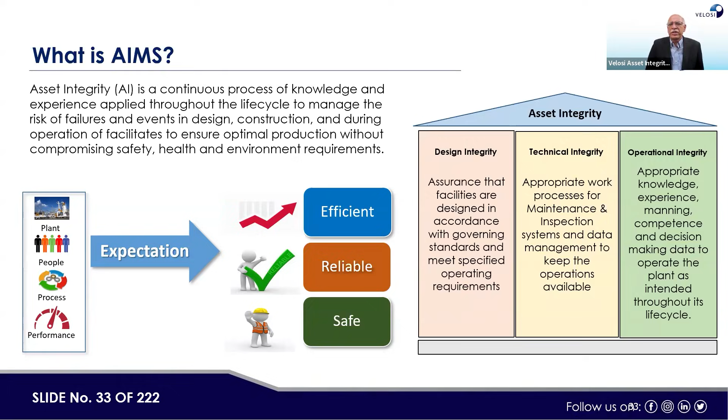Then in between there's technical integrity, which generally covers inspection activities, preventive maintenance, condition monitoring, predictive maintenance, and how you manage the facilities or the modification processes. So in general, to have more efficient, more reliable, and more safe operations, all three aspects are important and relevant. Now, what is HSEMS?

HSE - H means health, S means safety, E means environment. MS means management system. If we are having any running facility or operating plant, there could be some side effects or some operational threats of those operations which are being run.

For example, if we are producing fertilizer, if we are producing glass, if we are producing oil and diesel fuel and gasoline fuel out of crude oil, or if we are producing crude oil or gas from the wells, from the underground wells. So all these aspects may have certain HSE related threats, and we need to manage them.

Because if a toxic gas releases out of any process, that can kill people. So we need to make sure the toxic gas does not come out of the boundary of the equipment, does not leak. If it leaks, it could be predicted, it could be detected, and then the operators or the surrounding of the facility should be able to take proper protective actions.

Similarly, any flammable fluid can create fire, so prevention of fire is another area. Similarly, if operators are working on any particular plant, there could be a health impact on the operators due to the release of any vapor or chemicals being processed by the facility, so those should also be managed. Similarly, work permit systems, work processing, like hot work permit, cold work permit,

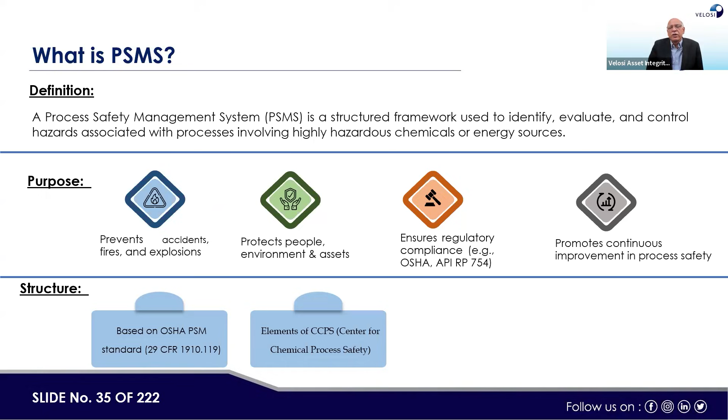If we try to make a comparison, all these elements are basically correlated, and we can make their comparison. Similarly, there are API standards like API 750, API 14J, API 754, and other API standards are also there, like API 584 and so on. NFPA 30 is also another area which gives good advice regarding process safety related issues.

Now if we see what the purpose of all three is, like AIMS, HSEMS, and PSM. We are not saying so far AIPS, which is asset integrity and process safety. The focus of AIMS clearly is asset integrity management related objective, HSE mainly managing the safety, and process safety by name covers practically both, because process safety cannot be achieved if we will not have a better AIMS system.

Because if a proper inspection and maintenance program is not being developed by the operating company, there could be an incident. So the combination of HSE related controls like PPE control, work permit system control, and other risk identification and risk management related controls, along with asset integrity management controls, are taken care by PSM. There is a commonality between AIMS, HSEMS, and PSM, which is basically the safety, health, and environment related aspect. So indirectly or directly there is a commonality in all three concepts.

So scope-wise, AIMS mainly focuses on assets, equipments, inspection, maintenance, lifecycle management, and its integrity. Similarly, HSEMS is more towards workers, environmental and safety aspects, health aspects, or environmental aspects. Then PSM, in my view, is a combination of both AIMS and HSEMS.

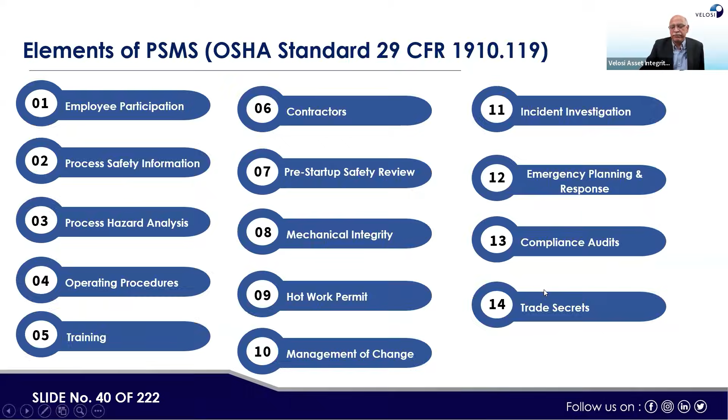These are the 14 elements for OSHA. The standards we are referring to are ISO 55001, OSHA 1910-119, and HSEMS, which is HSG65. If we try to find the equivalent standard in ADNOC, ADNOC also has an asset integrity management standard, or control procedure. They also have HSEMS, and they have also developed the AIPS standard as well.

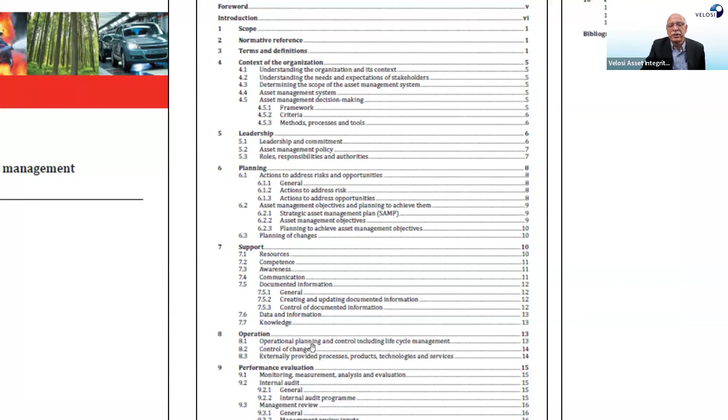This is the front page of ISO 55001, year 2024, asset management system requirements, and these are the elements - 7 elements, starting with context of the organization, leadership, planning, support, operation, performance, evaluation. Similarly, this is the outline I have taken from OSHA 1910-119 from their web page.

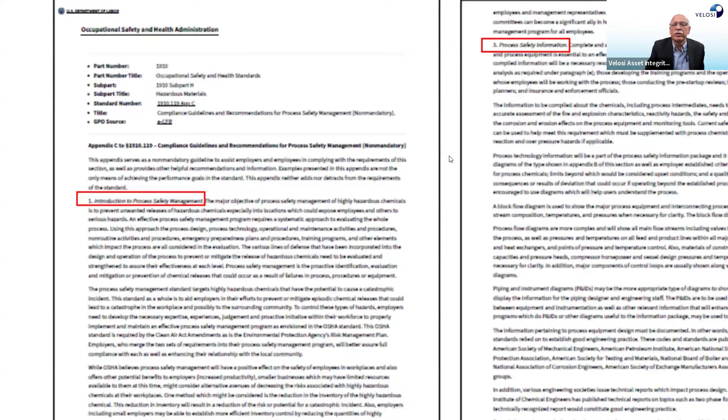So these are 14 elements. A lot of text is there, explaining each element. But if you wish to see them, this is a safety management system, or process safety information - process safety information is here. So similarly, these are the 14 elements. I'm not going through them, just showing you. Their details are available in this document which is attached, and this document can be downloaded. Both OSHA as well as HSEMS can be downloaded from their web pages free of cost.

So these are the standards. Now if we try to compare them, mostly things are matching - let's say risk profiling, or the aspects of, for example, planning, or support, or operations. So we try to bring in the elements that are superseding, or some alignment is there either in the main element or in the sub element.

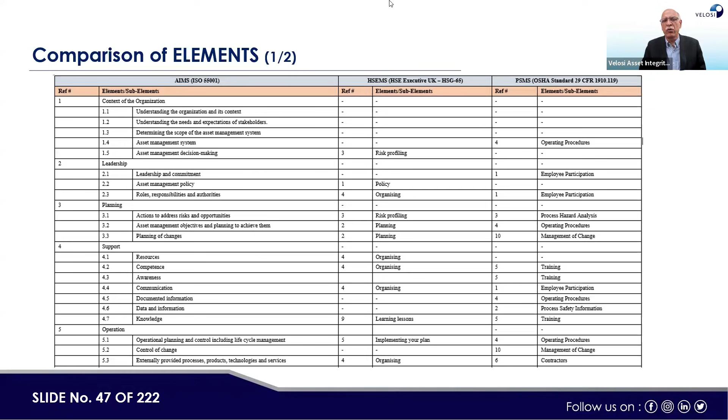This is the purpose. Now, what is AIPS? Basically, AIPS is AIMS plus PSM, asset integrity and process safety. When we say process safety, HSEMS is also direct or indirect part of process safety, but it's more towards people, whereas process safety is more towards the process. So by combining AIMS and PSM together, we may cover both HSE as well as asset integrity management through one umbrella.

Even though, like in ADNOC, still they are having 2 VPs in the organization. One VP is for HSEMS, another VP is for AIMS. Or there are also some scenarios where we have AIMS, and also one VP or manager for the PSM. So can we have one manager for both? That is the target. If we combine AIMS and PSM together and make AIPS, then organization structure wise, there could be one organization rather than two, as we are having nowadays with AIMS and HSEMS or AIMS and PSM. So that is the consideration, or soul searching, ongoing in various organizations.

And ADNOC has come forward to make AIPS, and this standard has been issued, I think, 2-3 years ago, and now it's under the implementation phase. So now, one thing to understand, there are certain risks which are coming from AIPS, asset integrity process safety - asset integrity and process safety, not artificial intelligence and process safety.

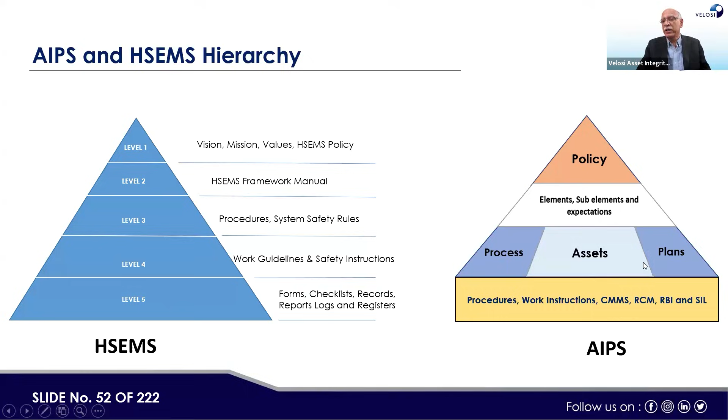But from an aspect point of view, here we have work process management system in HSEMS - hazard analysis, work permit system, cold work permit system, hot work permit system, PPEs and so on coming there, checklists and forms, work at height, safety of lifting equipment, electrical safety, LOTO system - those come under HSEMS. Whereas the management of the complete asset system, like operating manual, DCS, ESD system, fire and gas management system, CMMS system, IMS system, all the plant related operations come under this side of AIPS.

Now, to check whether the message is being received by the audience, the first question is: AIPS is a combination of what? Please type in your answer in the chat window. We'll see the responses.

AIPS is the combination of AIMS plus PSM, or AIMS plus HSEMS, or HSEMS and IMS, or AIMS and AIRMS. Mostly the answer given is true, and the correct answer is A: AIMS and PSM's combination is called AIPS. Again, AI here is Asset Integrity Management, not artificial intelligence. Nowadays there's a lot of focus on artificial intelligence, so I don't want that to cause confusion.

Now one more question, just to check our memory. How many elements are there for PSM, OSHA standard 29 CFR 1910-119? Options are A) 07, B) 08, C) 14, D) 20. The answer is mostly being given correctly by participants: 14.

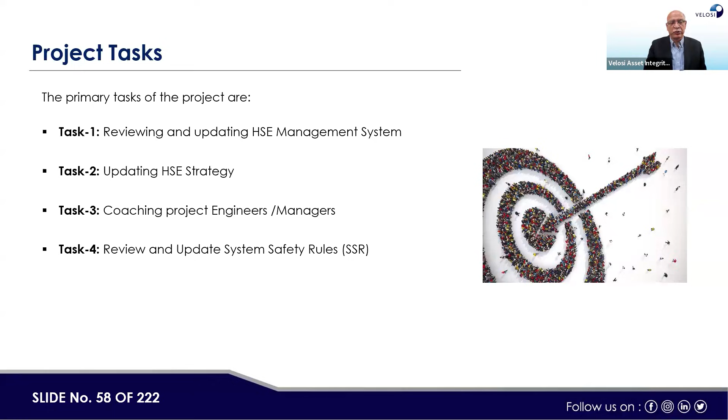The scope included reviewing and updating the HSEMS management system, updating HSE strategy, coaching project engineers and managers, and reviewing and updating system safety rules. This scope was compliant with ISO 9001, 14001, 45001, 50001, HSE Executive UK, OSHA USA, HS(G) 65, also OSHAD, TAQA, Department of Energy in UAE, and procedures and legal requirements were also taken from the operating company.

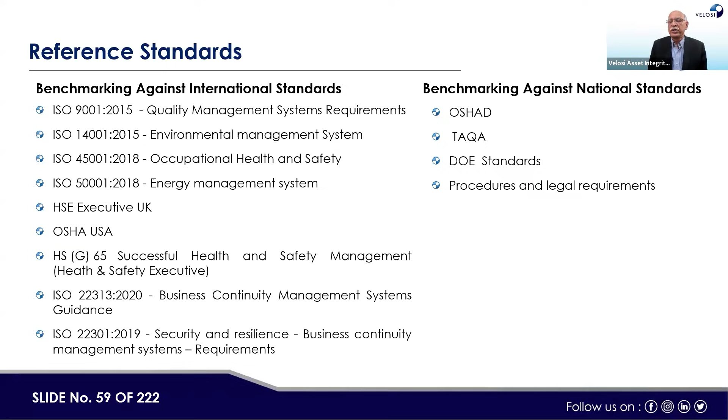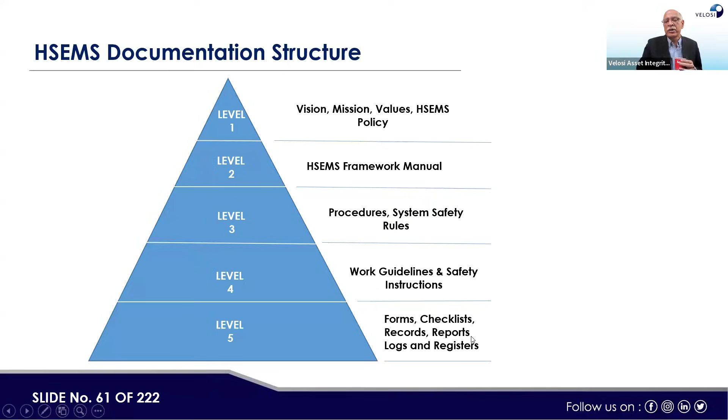Level-wise, the same 5-level documents were prepared: vision, mission, values and HSEMS policy; HSEMS framework manual; procedures, system, safety rules; work guidelines and safety instructions; and forms, checklists, records, reports, logs and registers were also developed.

Here, same plan, do, check, act structure. Under plan comes element: leadership, commitment and accountability; then element 2, regulatory compliance and industry standards; then element 5, hazards identification, risk assessment and management.

Similarly under do, we have resources, competency training, communication awareness, documentation and information accessibility, engineering controls, safe operations, crisis and emergency management, integrity maintenance and reliability, management of change, and management of third parties.

Then when we go to the elements, if we have to see more details for each element, for example under leadership, commitment, and accountability, I will not go through all details, otherwise this will take more time. I have to cover almost 150 more slides, so there would be certain rush, since we need to close the presentation by 4 o'clock, Abu Dhabi time.

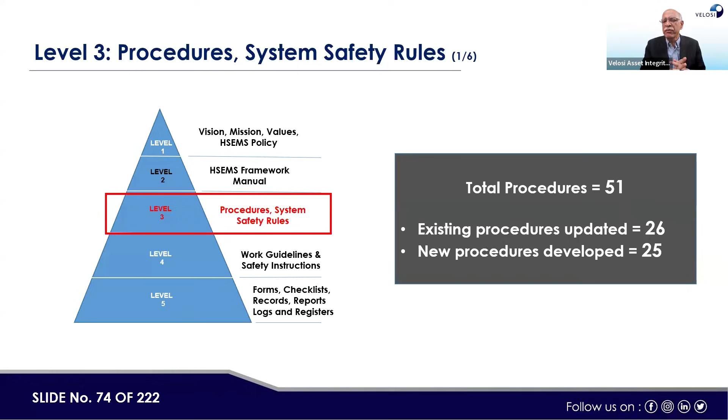So since we are just giving you an idea to have an HSEMS system, first is vision, mission, policy, and the HSE policy document is there. Then the framework is there, which I showed you. Now I have procedures. Total procedures 51, 26 existing, 25 new.

So what are those names? For example, procedure for control of documents and records. I'm not reading all, I'm saying one by one, but I will say a few. For example, procedure for HSEMS training and competency, procedure for HSEMS legal and other requirements, procedure for HSEMS monitoring and reporting.

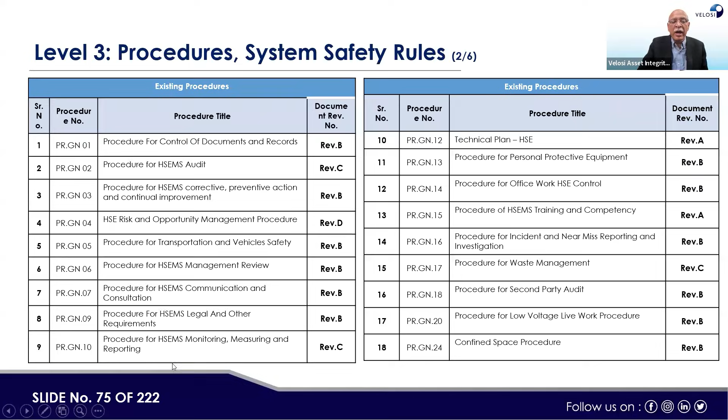Here, if I go to the last slide on the same series, procedure for safety signage and signals, portable power tools procedure, procedure for hazardous material. Similarly, system safety rules, client system safety rules, also prepared.

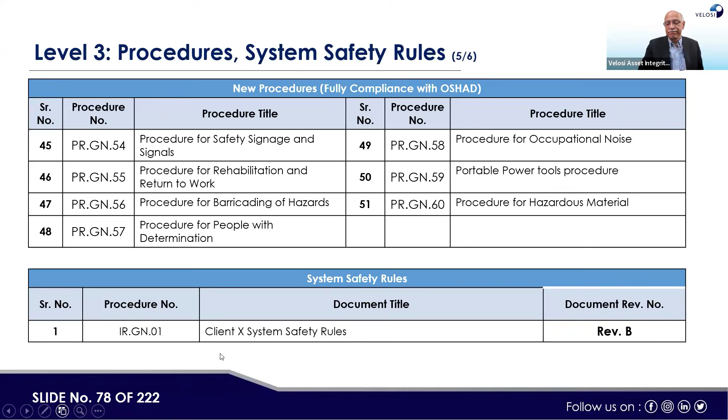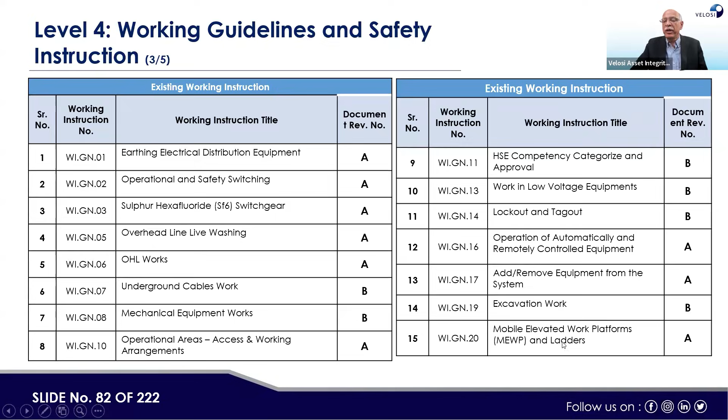And then these are the 15 guidelines and safety instructions. I will not read all, earthing electrical distribution equipment, for example, lockout and tagout guidelines, then excavation work procedure, mobile elevated work platforms, MEWP and ladders. So these are all guidelines and safety instructions issued and prepared.

So health surveillance plan, for example, this is one of the guideline procedures. You will see the content. So this is better, you can see here responsibility definitions, scope, purpose, introduction, then responsibilities, health and safety, health and surveillance program requirements, then implementation and so on. So these are the content of that particular procedure.

This is another HSE guideline for working in the vicinity of the asset. These are the emergency contacts and appendices for that, which would be used by the technicians, operators, and managers of that particular work center.

Now, last but not least, there are forms. 69 forms and checklists were prepared. For example, high voltage isolation of the switchgear checklist, HVLB cable maintenance, general confined space management, HSEMS induction checklist, life cycle of HSE risk assessment. There are various topics covered in these forms: environmental objective form, hazardous waste transfer form, qualification questionnaire for the contractors, HSE technical bid evaluation sheet.

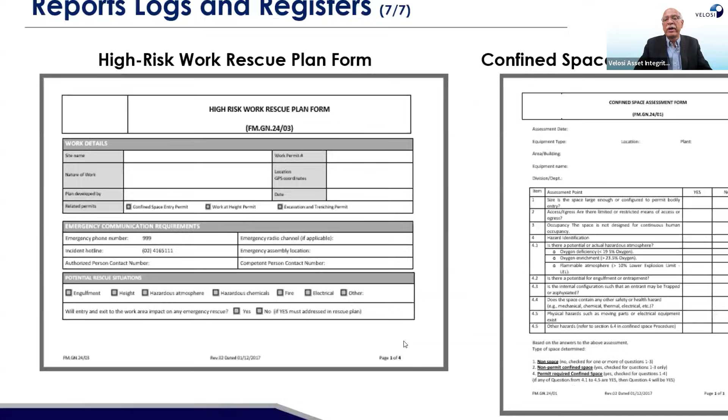The high risk work rescue plan form. The work details and requirements are filled and those are followed by the working team. Similarly, another confined space assessment form - a checklist which is required to be filled by the relevant job officer and the technicians.

So here's a question to make you people involved. How many levels are there in the HSEMS documentation structure? This question is to keep you awake, otherwise it's a very boring presentation. So the answer - one was wrong, I saw D was given, but mostly the answer is right, and that is B, 5. There are 5 levels in the document hierarchy for the HSEMS system.

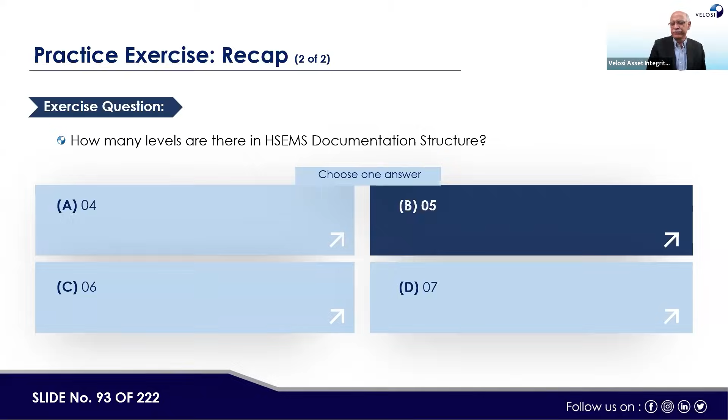It can also apply to AIPS as well. I will go through a sample dashboard of HSEMS, then we will have a question answer session at that stage. What is the purpose of an HSEMS dashboard? Real-time visibility of HSE performance, number one. We can also see what kind of incidents or incidental trends are there, then what kind of corrective action we need to take based on those trends. What are the audit recommendations? How many risk level aspects are there? What are the compliance tracking aspects? There could also be environmental monitoring, incident monitoring, safety related incidents, or even process safety related incidents which could be reported as well.

If you see here, for example, a normal dashboard - we were conducting one audit a month back. The company was using some HSEMS system, like HIRA, where they were reporting all the HSE related information in a common dashboard. It was quite effective. Similarly, Velosi's AIPS software has a similar reporting feature, which could be reported from each site, and then all company sites can be seen at head office through one dashboard. So here, total number of man hours, number of days without LTI (lost time incident), incident records, preliminary investigations, final investigations - all these counts can be shown through the dashboard.

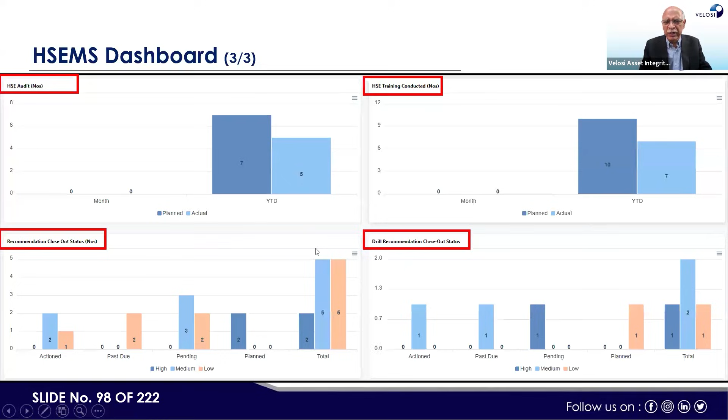That's the message. There could also be work permit related issues, environmental related performance, and health related performance as well. Here, audit plan - whatever the audit-wise pending audits or executed audits. Similarly, internal audit schedule, when it is required to be done, whether it is being complied with or not. Then here, a question: which of the following is not a KPI of HSEMS?

There is one negative question. Options are: lost time incident, near misses, fatality, and production. Which one is not an HSEMS KPI? Try to fill it in. Yes, mostly the answer is right.

It is production. When we talk about HSE, production is not a KPI for HSE in general. Somebody may also add this as a KPI, it's not hard and fast, but in general practice, this is the message. Some people may also add production, saying without production there's no safety, so production is also an HSE KPI. That could also be the case, but we can compromise on production, we will generally not compromise on safety.

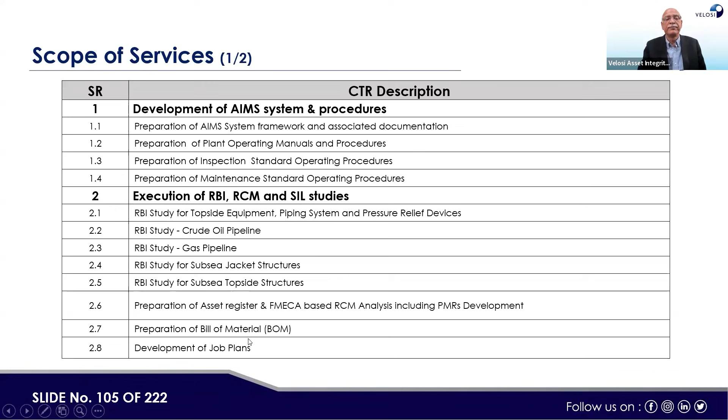Then preparation of the asset register, FMECA, RCM analysis, including PMRs and job plan development. Then preparation of the bill of material for various equipment, development of job plans or task lists or MWIs. Then identification of dead legs, small bore identification, injection points, corrosion monitoring and support locations, and preparation of their register. Preparation of inspection drawings for topside structures, for subsea jacket, for topside piping and equipment, and for pipeline and riser, seal review and assessment, spare part optimization except pipeline, then spare part optimization for the pipeline.

Then implementation of SCs identification and management system, and implementation of HSEMS and CMMS system as part of the overall project. So basically, if you see, all these processes we implemented - it was done at the project's initial stage when the project was being built. So all these studies were being done in parallel.

So when we go to the AIMS system, it was comprising of 17 documented systems. We have design and project management, PIMS (pipeline integrity management system), SC management system, pressurized equipment management system, structural integrity management system, civil integrity management system, electrical equipment integrity management system, instrumentation and control management system, rotary equipment management system, quality management system, EPRS, PSVMS integrity management system, lifting equipment integrity management system, IMS meaning inspection management system, and MMS meaning maintenance management system. These systems, as a documentation, were prepared as 17 documents.

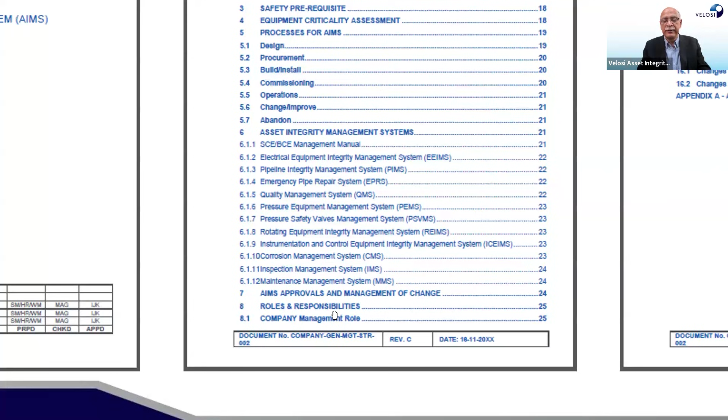Now, let me show you one document as a sample. This is the asset integrity management system comprising the complete life cycle process for AIMS: design, procurement, build, commissioning, operations, change, improve, abandon. Then asset integrity management systems, including all those 17 systems, are referred here again. At the end, you see the asset management system interface and ownership, execution point of view, development phase, operation phase, aim, result management, system administration, audit, physical and system audits, accountability and responsibility, key performance indicators, interfaces, RACI chart, and so on.

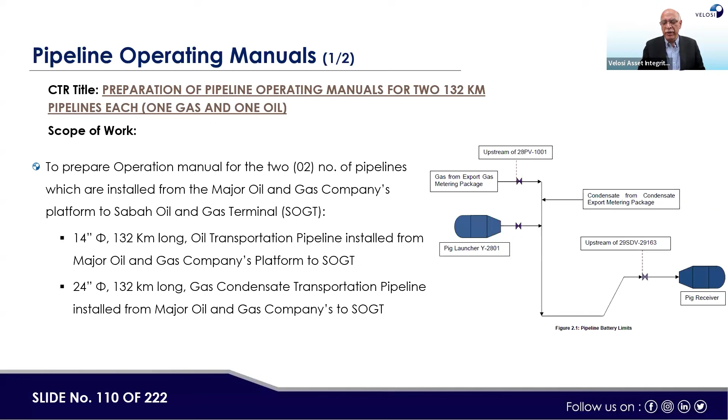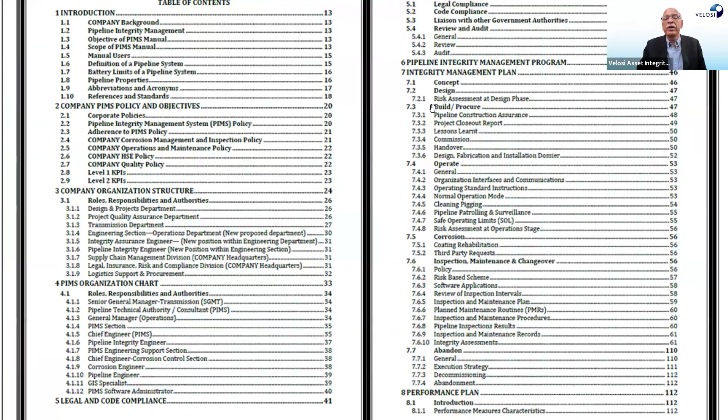Next was the operating manuals for the pipelines, and other topside assets were also prepared. This was the content of the pipeline operating manuals, one of the manuals, and you can see it is real documentation: introduction, company PIMS policy and objectives, company organizational structure, PIMS organization chart, legal and code compliance, pipeline integrity management program, and so on. This was the complete documentation for the pipeline integrity management system.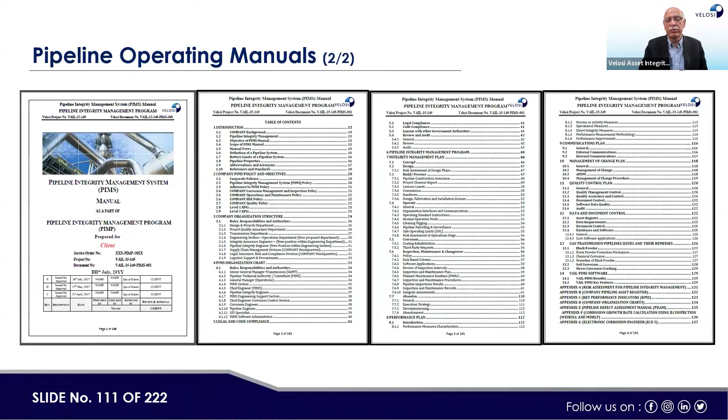Similarly, for other processes, these manuals and operating procedures were also prepared. I gave you the title of the documentation in the previous HSEMS example. Similarly, there were 74 inspection standard operating procedures prepared.

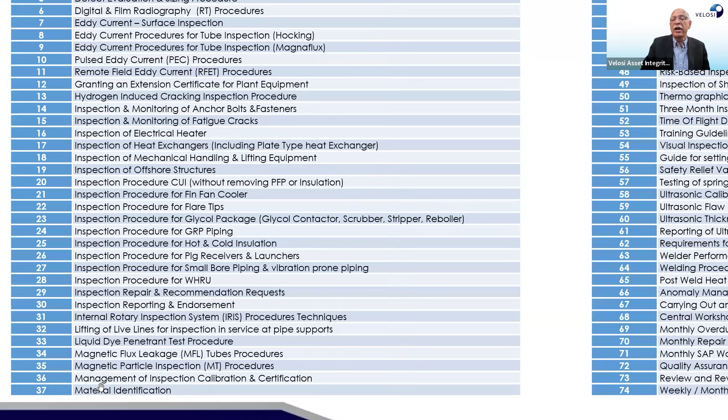I will not go through the complete list, but examples include acceptance of mothball certificate for plant equipment, inspection procedure for WHRU, magnetic flux leakage tube procedure, management of inspection, calibration and certification, material identification, monthly repair and recommendation report preparation, monthly SAP work generation, quality assurance of equipment fabrication, and review and revision of inspection reports. This way, 74 SOPs were prepared as per the company needs.

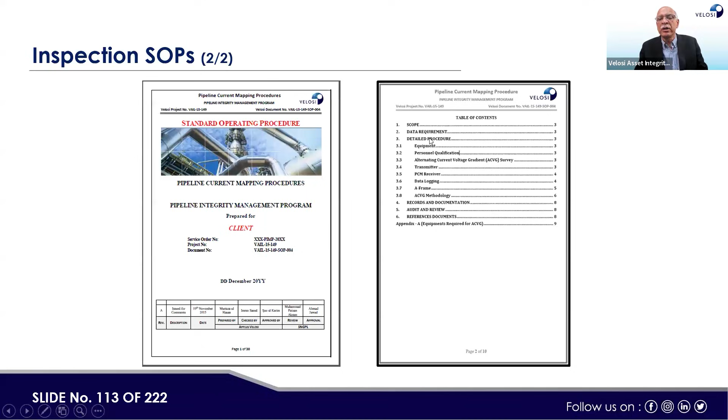This is one example, the pipeline integrity management program prepared - this is the documentation, client name is changed. Here the complete procedural requirements are documented in this document.

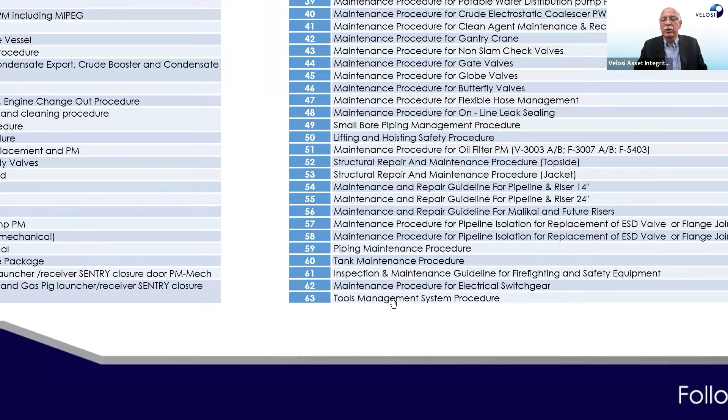Second set, we prepared 63 maintenance standard operating procedures, similar to the maintenance procedure for gas metering package. I'm not reading all, just a few examples at random: maintenance procedure for crude export, condensate export, crude booster and condensate booster pumps; structural repair and maintenance procedure for topside; piping maintenance procedure; tool management system procedure. So all the procedures the company may require are prepared for operators and technicians to use.

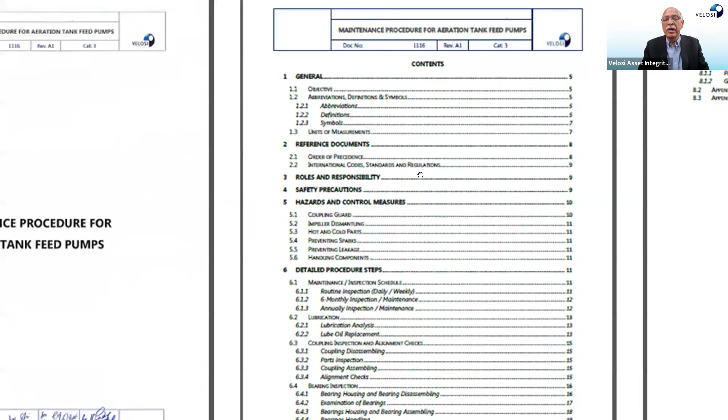This is an example, maintenance procedure for aeration tank feed pumps. This procedure covers roles and responsibilities, safety precautions, hazard and control measures, detailed procedural steps, records and documentation, references, and a receipt chart.

So now we've completed the procedures and documentation. Now the various studies like RBI, RCM, and SIL, which we did to implement the CMS and IMS systems, are not compulsory to be done. You can develop CMS and IMS systems without conducting these studies, but these studies help optimize your resources.

For example, this is the risk-based inspection program and data for uploading into Vail-Plant software for static equipment, piping systems, and pressure relief devices. These are the corrosion loops - we performed RBI assessment, including preparation of asset register, corrosion loops, risk ranking, detailed RBI report, and C&I manual, meaning corrosion and inspection manual. Assets covered include all static equipment, pressure vessels, heat exchangers (approximately 300 tags), and piping systems (approximately 4,000 tags). Here you can see the outcome of the software: allocated damage mechanisms, assessment of probability of failure, assessment of consequence of failure, assessment of risk, assessment of inspection effectiveness, and inspection plan.

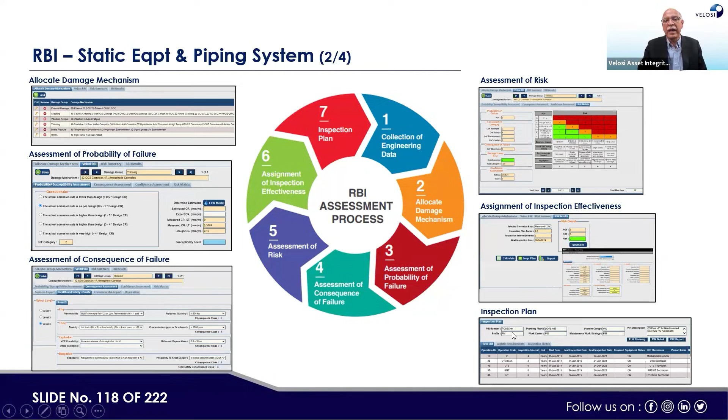Then dashboard reporting like remnant life, risk, inspection and PMs, and standard reports which are part of the software, and the asset passport as well for each particular equipment and piping tag.

So this is the equipment and piping side, the static equipment side, inspection history recording, ultrasonic thickness baseline survey records are brought in, and visual inspection records are brought in.

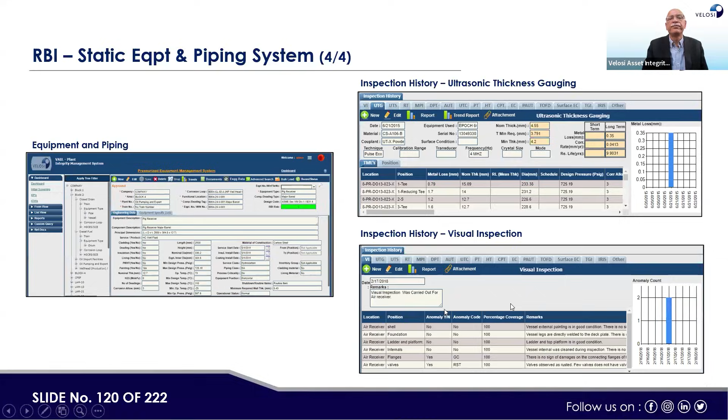Inspection drawings are also prepared based on the TML, CML marking. The preparation of inspection drawing for topside equipment and piping system, all static equipment covered, 300 static equipment and 4,000 piping systems are covered also.

Then we also covered dead legs, corrosion under insulation points, injection points, and small bores, and all those equipments are marked on their drawings and their register prepared.

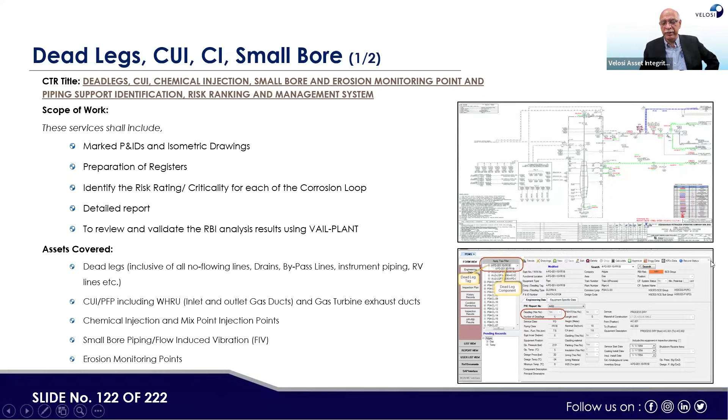So here you can see the small bore and injection points, very small bore points are marked on the drawing, and dead legs are marked here on the drawing.

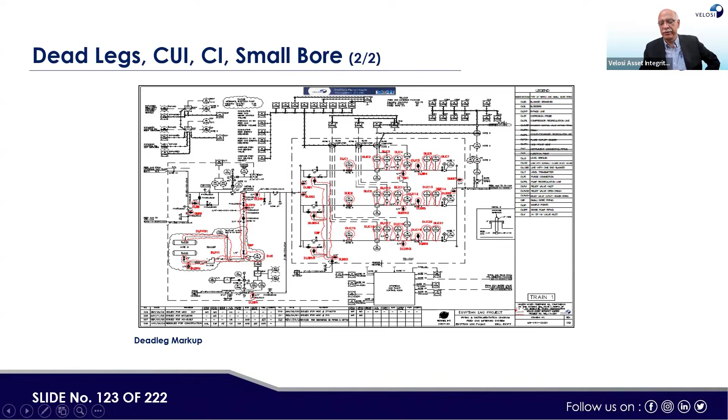Then risk-based inspection study report along with the software that is also developed so that people can use it as a record or reference in future.

Then pressure safety valves, basically we covered under a FMECA approach, and the total PSVs studied under this scope were 200. So we covered the FMECA approach and then developed the inspection and bench testing program for these PSVs.

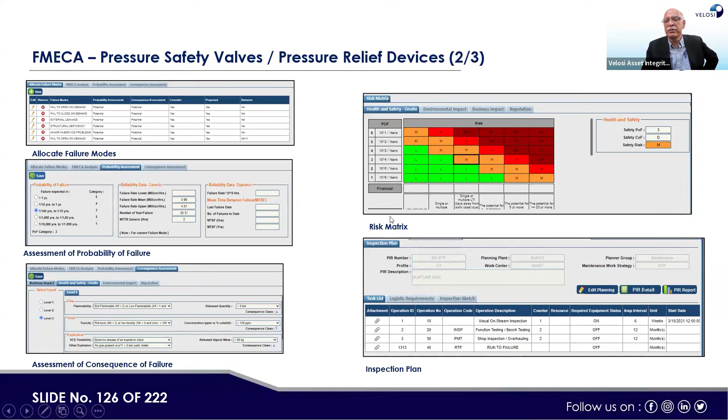So here you can see these are failure modes, allocated failure modes and their assessment. Then there is probability of failure and consequence of failure, and the risk assessment and the risk matrix. And then this is the inspection plan developed for the PSVs.

So my speed is a little fast because I have to cover this presentation before 4. So this is a target. That's why you have to bear with me.

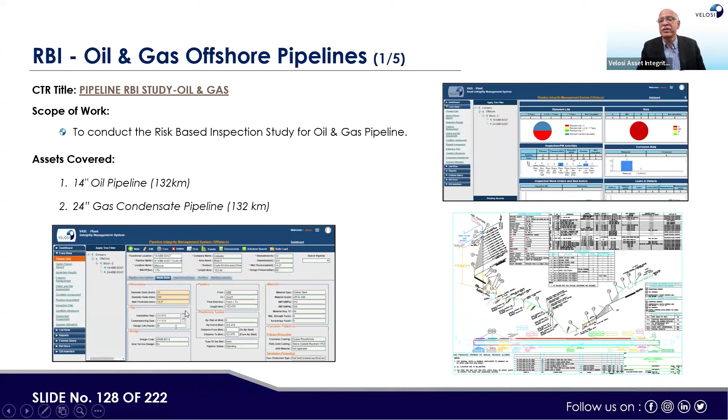So for pipeline RBI study, we basically divide the pipeline into various sections and segments. You can see where all the internal and external damages are marked, and each section is assessed, and the dashboard also you can see for the other assets.

And then dashboard on the same pipeline side. This is basically the pipeline assessment, and this is the standard report, whatever report we want, drawn from the software Vail-Plant, that can also be brought in.

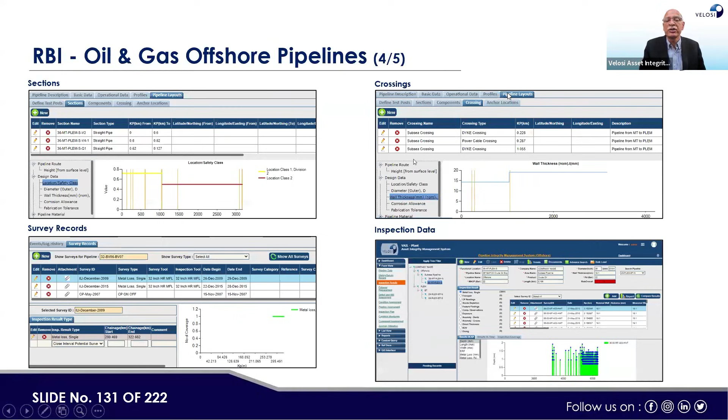Then this is basically oil and gas, this offshore pipeline for the oil side. Here the same sections, survey records, crossings, inspection data, which can be used for the analysis.

So here defect screening, code check as per B31G, and then there is risk assessment, clockwise orientation of all the defects, and assessment of the results under the code. This is also available in the feature and done.

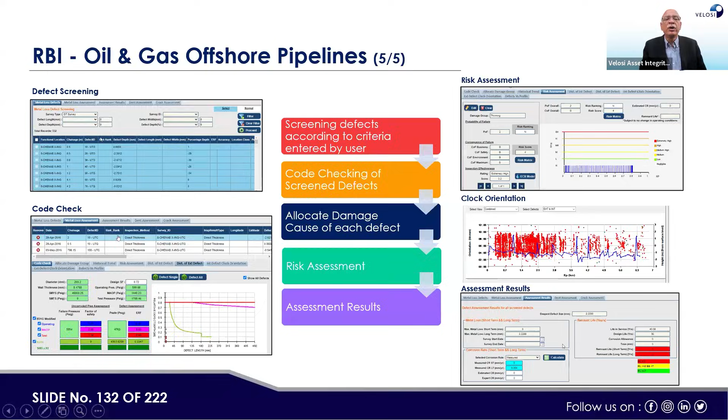Then for the RBI study for the jacket of the structure, all marking of the tags and joints of the jacket was done.

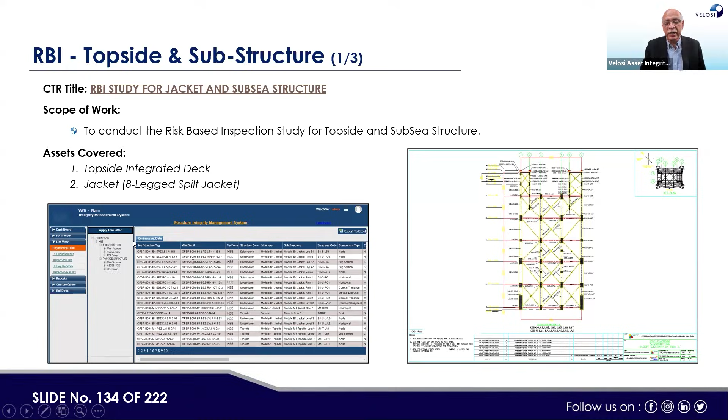You can see how many components of this structure are high risk or low risk, and accordingly you can see the dashboard and reporting feature.

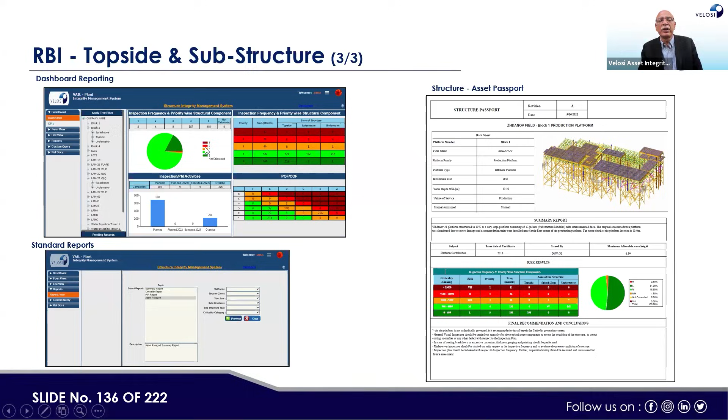Then inspection drawing for the structure is also prepared, like what kind of inspection and where we need to do detailed inspection plan marked on the drawing.

Then FMECA analysis for the electrical, instrument, and rotary equipment, where asset register is prepared, then FMECA is done for each particular tag, followed by probability analysis, consequence analysis, risk ranking, and then we prepared the PM plans for all the tags.

Like here, allocate failure mode, FMECA analysis, probability assessment, consequence assessment, risk assessment, and PMR, and then job plans are prepared.

So FMECA based RCM analysis, here if you can see the dashboard, in reliability side, risk side, inspection PM activity side, maintenance side, the CM work orders or bad actors identification, failure replacement, this is the reporting feature, and this is the equipment wise, basically passport assessment report, asset passport.

Then bill of material, basically prepared based on the PMRs, like for each PM activity, the craft, their man hours, and the required BMs are also identified.

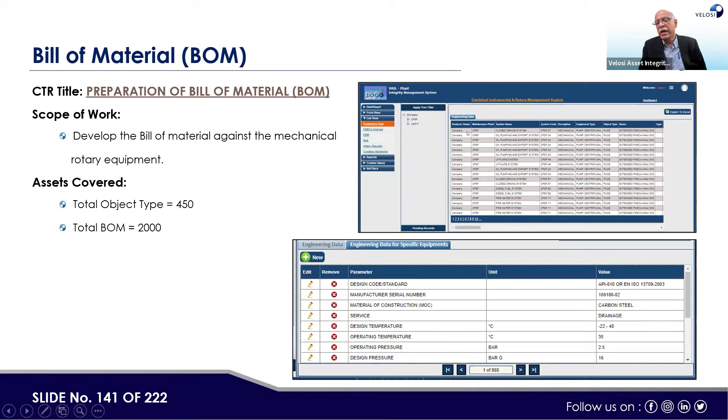Then these are job plans, or we call it sometimes MWIs. For each PM activity, these job plans are prepared. The total object types were 450, and job plans prepared were 2000.

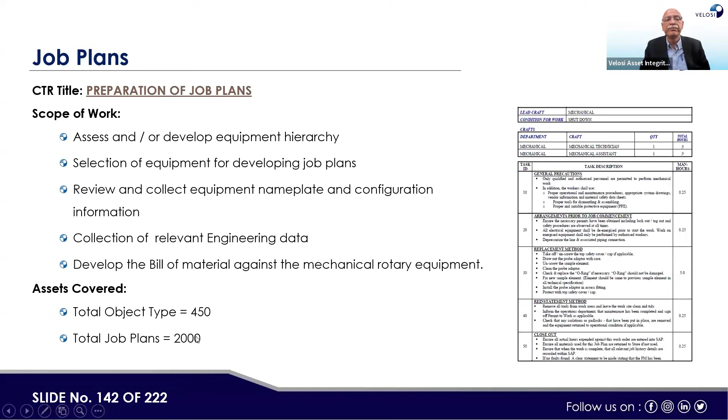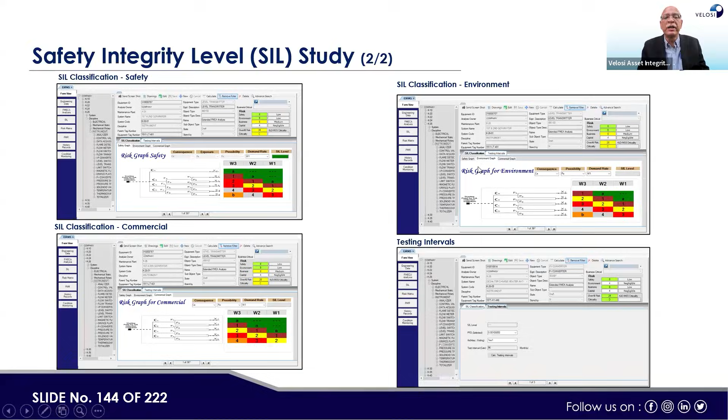Then SIL study: we did prepare the asset register for all the SIF loops, and their SIL classification and SIL verification was done, testing interval was prepared, and a general report is also prepared. SIL classification was done first by risk graph, and then also by LOPA, and accordingly testing interval was calculated.

If you see here, like prevention, detection, and basically all those aspects, these are prevention related various performance standards. The categories are shown, and accordingly, these were assigned various inspection and PM activities as per applicable performance standard.

So then implementation of APM, CPM, CMMS and IMS system. Basically we showed that already. It was a VAIL-Plant which was used for the management of all these operations. So here, what we implemented: APM, CMMS, and IMS we also implemented.

Here, like this is the complete screenshot of what we implemented: CMMS, ISMS, APMS, PEMS, PIMS, onshore, offshore, EIRMS, PSVMS, SIMS, lifting equipment management system, well integrity management system.

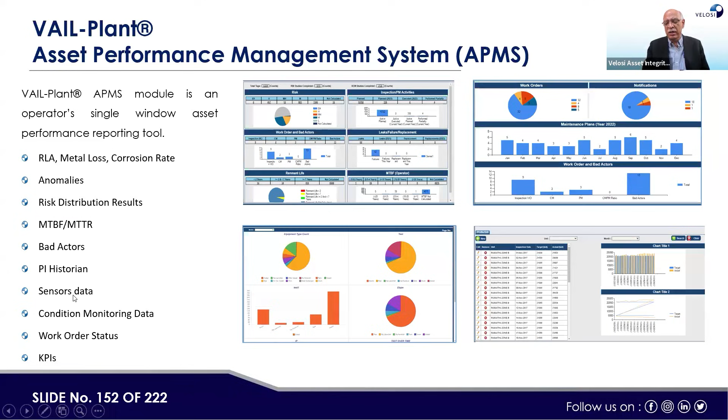So here the CMMS system where the various work orders, a dashboard on the work order system, shows how the work orders are being executed, how the data is being recorded, how the performance is being evaluated.

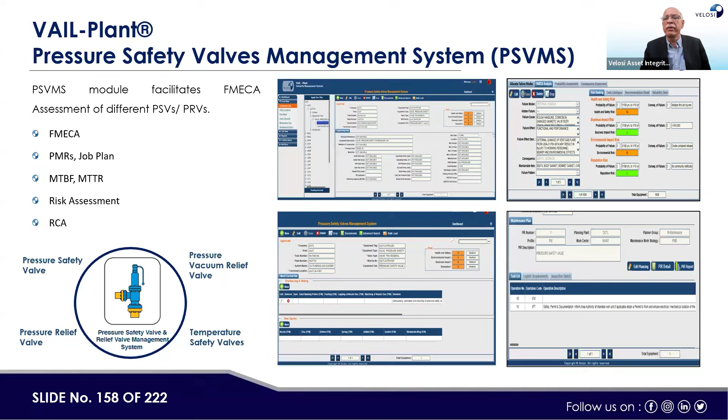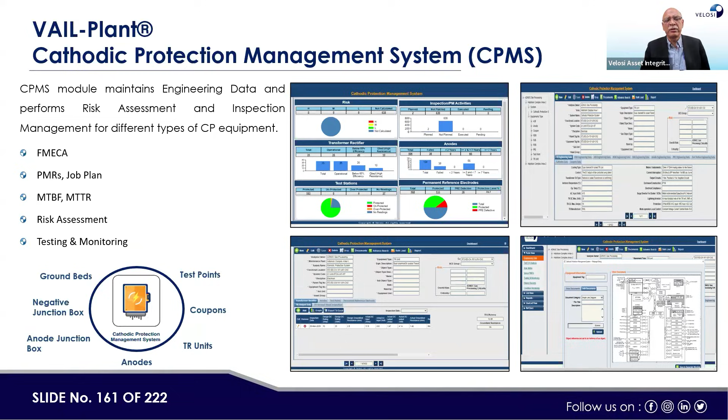Then like this is the PMS system I showed you earlier, implemented. This is the SIM system which I showed you earlier, implemented. Then the PIM system also shown earlier, implemented. Then electrical instrumentation rotary management system is implemented. Then pressure safety valve management system is also implemented as part of APMS. Then lifting equipment integrity management system is implemented. Civil integrity management system is implemented. And CP management system, cathodic protection management system, is also implemented. A well integrity management system is implemented. And ISMS, the inspection schedule management system, is implemented. And last but not least, the APMS.

This is the integrity KPIs which are calculated based on the performance. This feature can also be used by the operator.

Here's a question, so as you are not sleeping: which software was used for management of AIPS in the above case study? I'm not trying to promote our VAIL-Plant, but I want you to remember it was used. So the answer, yes coming, mostly right, is B. Velosi VAIL-Plant is used for this AIPS implementation for this Malaysian client.

Now, one more question. AIPS includes following management system. One answer is true: technical integrity management system, operational integrity management system, design integrity management system, HSE management system. So the answer is E. AIPS basically includes all of the above.

So now the last part. We have done HSEMS and we have done AIPS, but there is operational integrity, not HSEMS, not incidents, not lost time incidents, not near misses, not environmental emissions, or impact on health, which is covered under HSEMS.

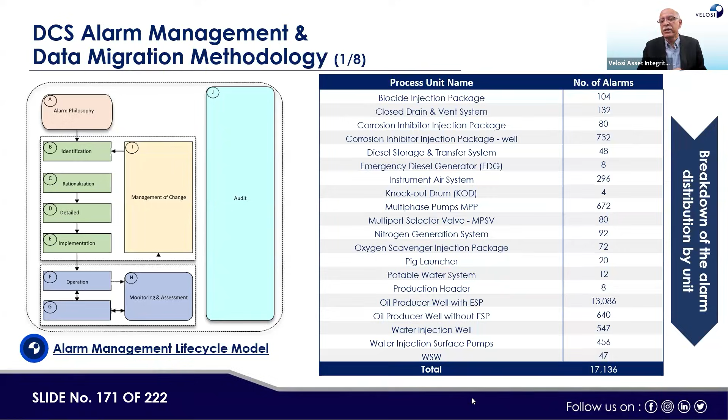So here, for one particular client, we did this study, and there were 17,000 alarms involved. Just quickly, I'm going through it.

Then direct alarm tags, events. If we have to check the alarm, one way is the alarm control room can also report daily activities. Another way is if you take out all the alarm data in a PI historian, then our Vail-Plant AIPS, VAIL-AIPS, can demonstrate the alarm behavior, what kind of alarms are coming the most.

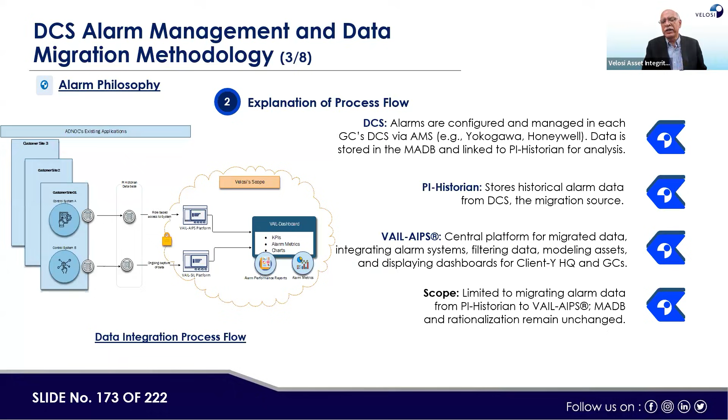So from an alarm philosophy point of view, the alarms are managed by DCS, then data comes to PI historian, then we take the data from PI historian to find which are the most repeated alarms, which are the most diagnostic-related alarms, and how many alarms are coming from the critical side. Otherwise, alarm-wise, you may not have a record in the DCS. This is the problem with the DCS.

So now, if we take the alarm data and bring it to the PI historian and then to AIPS, we can demonstrate those KPIs and alarm metrics to match if the progress or monitoring of alarms is being done as per company policies.

For example, here we had 17,000 alarms, and these alarms are in thousands, but this is a small facility, that's why a sample case study is shown. 17,000 alarms, of which ESP and corrosion inspection system alarms are currently disabled - there are 11,000 alarms disabled practically. Alarms not available on the P&IDs serve only as a pre-alert - there are 4,000. Actual process alarms on the P&IDs are currently 1,982, out of the total 17,000.

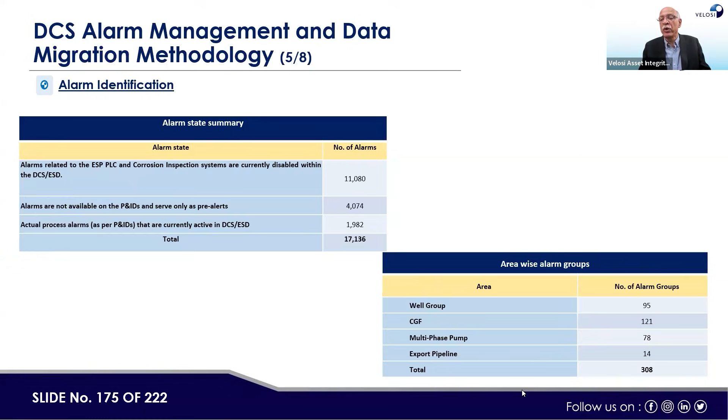Then well group, CGF group, multi-phase pump group, export pipeline group - these are given 308 types of alarms. Then how these alarms are distributed across various sections, like biocide injection package, closed drain and vent system. I'm not reading all, but for example type 1 oil producer well, type 1 oil producer well without ESP, type 1 water injection well, and so on.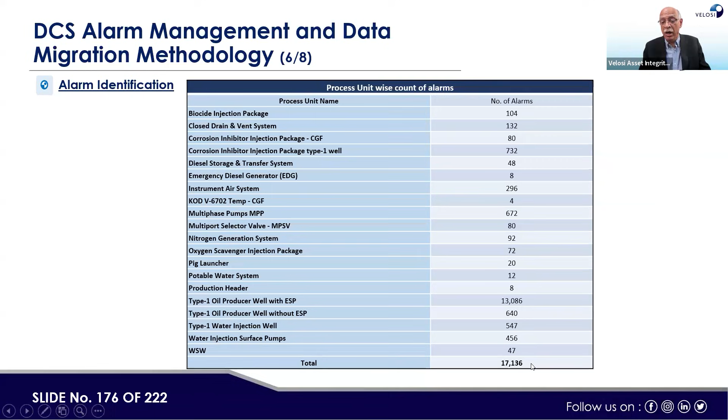So totally 17,136 alarms. Here, identification in the AIPS - what kind of data we can have, like alarm equipment, its variable, set point, severity, consequences, and so on.

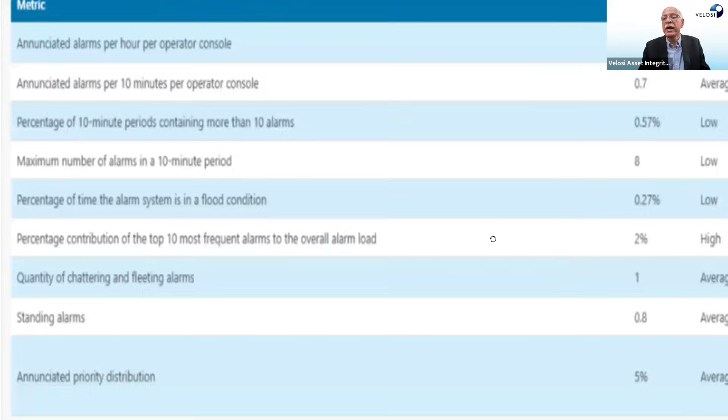Alarm KPI view, general KPIs are like there should be less than 10 alarms per hour. Then you see alarms per hour per operator console, alarms per 10 minutes per console, percentage of 10 minute periods containing more than 10 alarms, maximum number of alarms in 10 minute period, percentage of time the alarm system is in the flooded condition, actual versus the target.

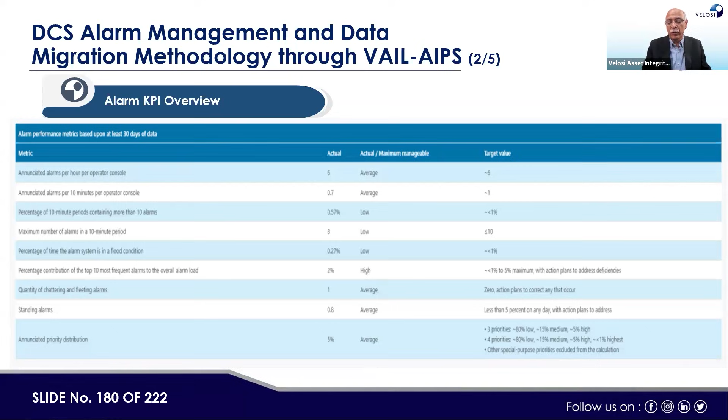Then quantity of chattering and fleeting alarms, standing alarms, and there could also be shelved alarms. So all these alarms are covered as per the target and actual value, and that can be presented to management. It is one of the key process safety parameters, because the operators are the first line of defense for plant operation and plant safety.

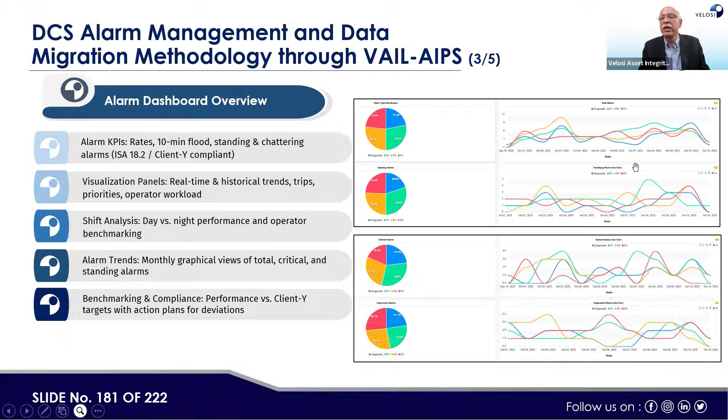So here you can see the alarms point of view. Here the same alarm KPIs like 10 minute flooded, standing and chattering alarms as per ISA 18.2 client Y. And here you can see the alarms which are running here, for example diagnostic alarm, P1 alarm, P2 alarm, and P3 alarm, date-wise, how many alarms were being seen.

This first one is the total alarms, then there is the standing alarms, then this is the shelved alarm, and then there is the suppressed alarms. So all the alarms in quantity can be seen via this graph if data is available.

So those are the types of alarms. Now, since time is lesser, I have to rush through. Last part of the presentation is basically SIS and SIF.

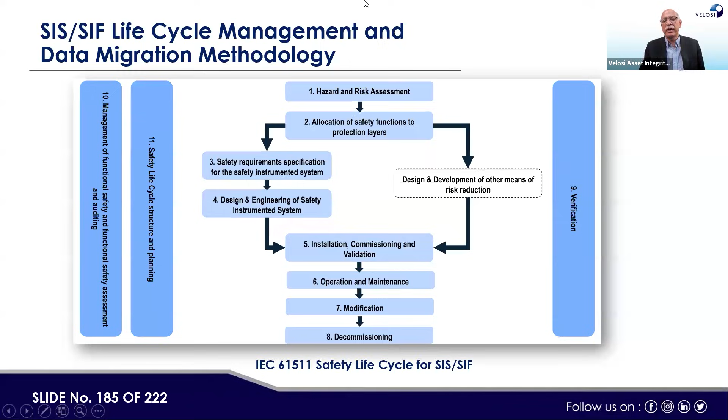SIS and SIF, all the ESD shutdown systems are covered. First of all, hazard studies done with the TMEL, targeted mitigated event likelihood, is defined. Then accordingly, LOPA analysis or risk graph analysis is done, and then the life cycle management aspects of the SIFs are managed. I'm rushing through, sorry for it.

Now, what is SIL? SIL basically stands for safety integrity level, which defines the reliability level of a particular ESD system. That ESD system consists of sensor, logic solver, and final element.

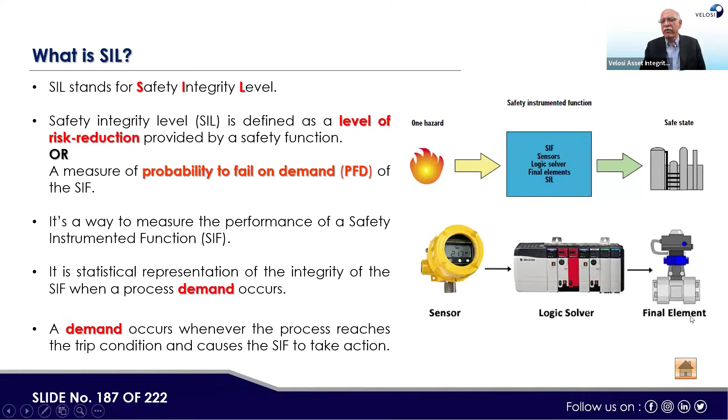Like here, first we need to measure, which is a transmitter. Then we need to think, which is a logic solver. Then we need to have final action to close either motor, engine, or we have to close the ESD valve, or open the blowdown valve. This is called final element.

For example, SIL 1 is the lowest SIL, meaning 1 out of 10 failure rate acceptable. SIL 2 means 1 out of 100 failure rate acceptable. SIL 3 means 1 out of 1,000 failure rate acceptable. And SIL level 4 means 1 out of 10,000 failure rate acceptable.

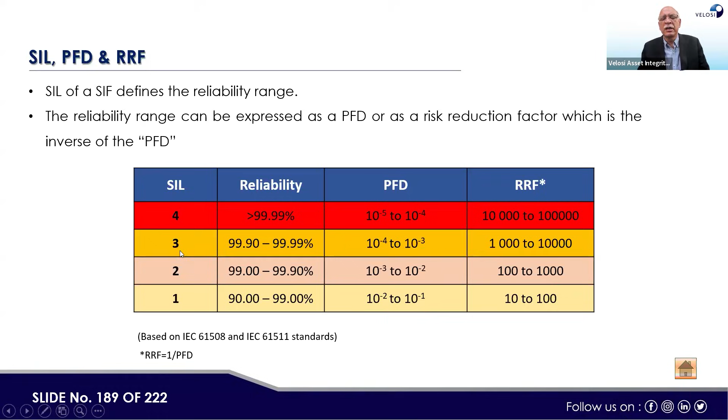It means 90 to 99% reliability, 99 to 99.9%, and greater than 99.99%. SIL 4 is generally impossible to achieve. The maximum SIL level remains between SIL 1 and SIL 3.

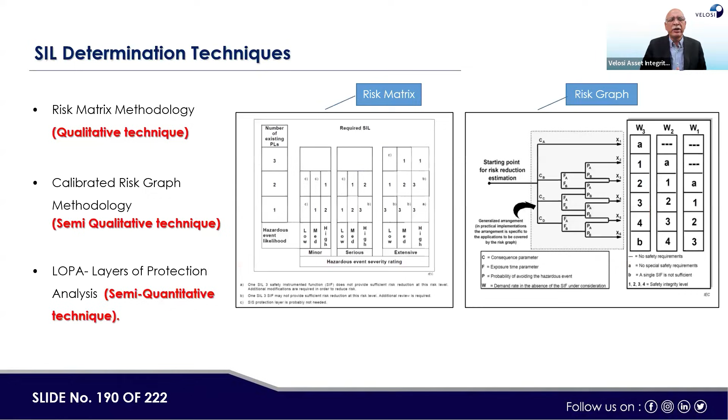This is one methodology. There are three methodologies for the SIL determination technique: qualitative, semi-qualitative, and semi-quantitative. Risk graph is semi-qualitative, and then we have LOPA, which is also a semi-quantitative technique.

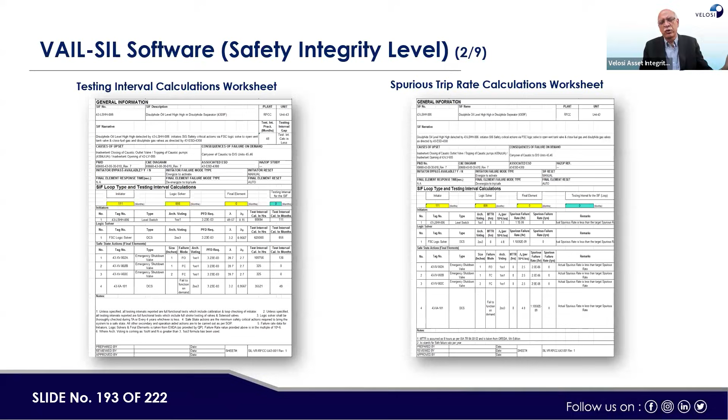You can see that. Then SIF operational history - basically this is the way I wanted to show, like Vail SIL software along with AIPS, can show how many SIFs basically activated automatically, trip over time, whether those were intentional through spurious trip or by operational intervention. Then how many initiators got initiated - SIF operational history for initiator side, then logic solver side, then final element side. So each record is being maintained separately.

Then the trip types - for example, if those were manual trips, automated trips, spurious trips, or no trip on demand also is one of the failure cases. Like when there's an ESD, you want to have a trip if a system is not working.

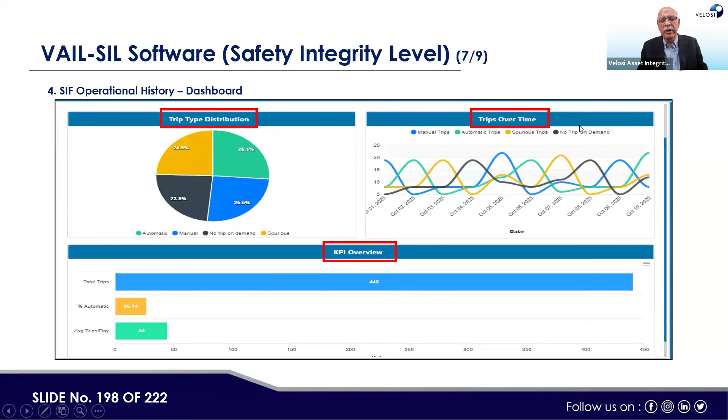Now I'm going to ask a question to keep you a little bit involved. Which of the following is not an alarm management KPI? We have to differentiate between alarm management KPI and SIF management KPI.

Options are: number of alarms per hour per operator, number of chattering and fleeting alarms, percentage of time system was in flooded condition, or number of SIFs activated per day. The answer mostly coming right, but there's one - option A, number of alarms per hour per operator - no, this is an alarm management KPI. Only SIF related information is not an alarm management KPI. The answer is D, mostly true.

So now we are just showing the AIPS dashboard, and then we will go to question and answer so we can conclude the discussion. Just trying to show you, because we started with what is AIMS, what is HSEMS, what is PSM, then what is AIPS, then HSEMS case study, then AIPS case study, then alarm management, then we went to SIF management, and now a complete centralized dashboard, how it looks like.

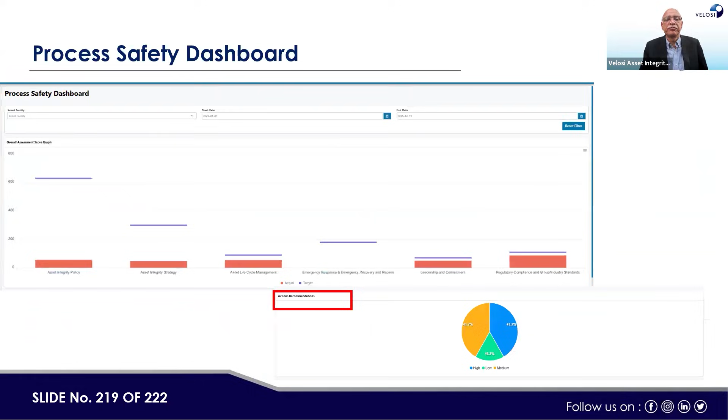So we concluded the discussion, and now we're going to the last question, and we'll take the other questions also. Which of the following is not a part of AIPS KPIs? Here, AIPS basically is not bringing in overview, but if HSEMS is also brought into AIPS, then it could also be - like lagging KPIs is a part of AIPS KPI. Number 2, safety critical equipment compliance KPI - it is AIPS.

Then leading KPIs, for example, schedule compliance and procedure adherence, and the pitfall or near misses - generally these are HSEMS KPIs.

So these are a little difficult, but we are not saying this is the set policy. This debate is ongoing in the industry, and every company may have different policy. Here, pitfalls or near misses are not basically a part of AIPS in general terms, but they could also be. So this is a qualification.

I would like to know whether the solutions which are there as part of Velosi, and the basket, can they be applied on maximum without any version limitation? And are they on-prem or on the cloud only?

See, the system can be used, is available. You can place the system on your server, and you can also place it on the cloud as well. So both options are available. It is a web-based system. It could be on premises, it could be on Azure or other clouds. And the system can work whatever stage you are at. It can be collaborated or configured based on your needs.